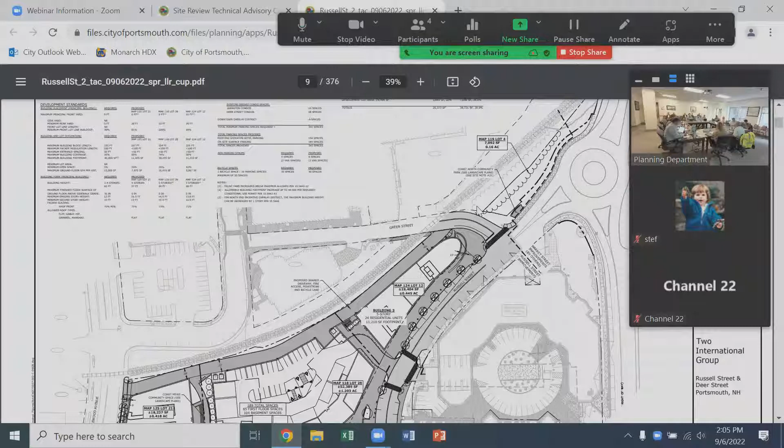Second, provide clear signage for parking garage parking and access. The rear drive aisle is signed as a private drive, and the garage access in the rear is going to be for residents only, so we don't really feel that additional signage is needed for that. I don't know if there's any further clarification of the intent of this comment or what is being sought, but we feel we've signed the site for the parking needs adequately.

Where will the visitor parking be? The visitor parking will be on the first level parking, and any residents will need to provide their guests access to get to those spaces. There's no public parking on site, so it'll all be controlled either by the valet of the hotel or by the residents in the building.

Third, add cobblestone channeling at the intersection of Green and Deer Street. I guess, is this intended to be within the center line of Green Street? Is that the thought here? I don't think we have an issue with it. The comment was add cobblestone channeling at intersection of Green and Deer Street. They don't meet.

I don't know if they meant Green and Russell, putting cobbles in the center line of the road. It must be that intersection, probably a Nick comment - he'll be here in a minute and we can clarify, but I'm sure that's what he meant. I can't remember what the cobbles were supposed to do though. We'll come back to that when he gets here.

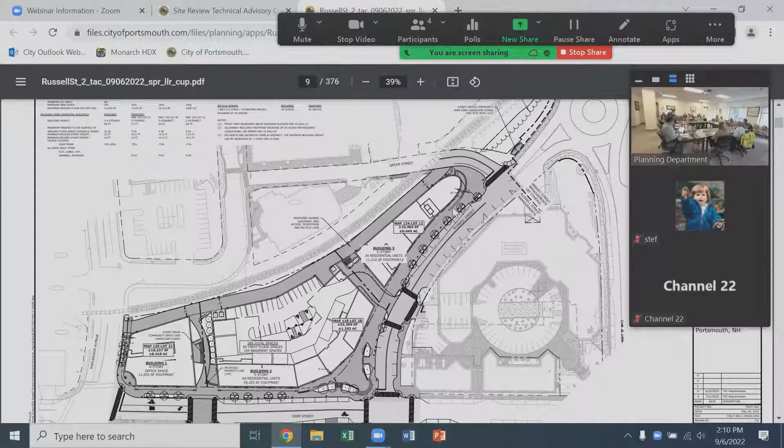Comment 7: please include a 5-foot mountable sidewalk to the building side of the shared path between the buildings and the railroad for designated bike and pedestrian area. Comment 47 actually contradicts this and asks for either striping or pavers to delineate that area, and our preference is to use flush pavers to delineate separate pedestrian bike access. The design intent was to have this be similar to Chestnut Street, where it's all flush pavers, all shared access, and when a car is accessing the garage, pedestrians and bikers move over to let the car pass. Having that mountable raised area kind of defeats the purpose of having that large shared access area.

On-site construction inspection required for everything in the right-of-way plus drainage - we acknowledge that. CMMP required - site note number 21 lists this requirement, so that's already noted on the plans.

Comment 10: confirm building footing is lower than city sewer line near Maplewood. I don't know about the depths of the footings at this time, and I don't even know if they've been designed yet. The sewer there is very deep - the invert into that structure is at 0.5, and the finished floor of Building 1 is at 17. So I'm assuming that's just something that will need to be taken into account when the building foundation is designed.

Construction, catch basin inlet protection on the opposite side of Maplewood is not required. That's fine, we can remove that.

Sidewalk crossings on train tracks need truncated domes, provide dome panels for both sides of the crossing, or replace the sidewalk up to the sidewalk on Vaughan Street. We can make that revision.

Both mid-block pedestrian crossings across Deer are shown with dual crosswalks. This reduces the amount of parking on Deer Street and will require parking and traffic safety approval. So we agree with the PTS approval. The plan does have a reduction in parking from what's out there today. I believe the current count is 7 reduced spaces. We do retain more of the on-street parking than the prior approval for this site, but we acknowledge that this will need to be reviewed by the committee as well.

Trying to get there, sorry. Drainage, one more sheet, Peter. Okay, thanks.

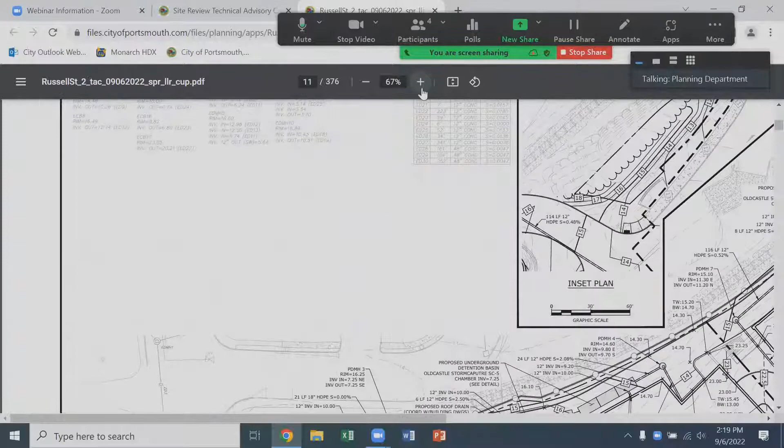Yeah, so on the left, catch basin, so we retain catch basin 3 as well, and then, okay. Yes, yep, sorry. Yeah, no, we... yep, can make that.

Move proposed catch basin 2 to the corner, eliminate drain manhole 14, and run new pipe to existing drain manhole 7. We can make that revision.

Eliminate proposed drain manhole 11 and run a new pipe from catch basin 5 to existing drain manhole 8. That's fine, we can make that.

Capture back driveway runoff as low as possible and direct it to proposed drain manhole 3. So the way this site is graded, the rear drive runoff sheets off the property as it does in the existing condition.

The drainage analysis has a detailed description of how we are meeting the city's treatment requirements for redevelopment sites. So we are treating and capturing the majority of the site's runoff, the majority of the impervious surface on the site, with really that rear access drive because of some of the grades. And I think it's noted in one of the next comments about how flat that drive is. Capturing a lot of that was difficult, but we were able to meet the treatment standards from the city's stormwater regulations for redevelopment.

While maintaining that existing flow pattern to the railroad. So that was 28 and 29.

Comment 30: the grease traps in the driveway to the garage are not located well. They need to be on the sides so that the driveway can still be used during cleaning.

So since we submitted these plans, we've been working with the project MEP and the architects to locate some of the mechanical spaces. And the water service lines for Building 2 are now going to be located up that driveway to access a mechanical room in the rear of Building 2. So along with the drainage, drain lines, electrical conduits, and then the 2 grease traps and sewer connections, that area is very tight.

So we will do what we can to try and keep those grease traps to either side as best we can. And as I had mentioned on a previous comment, that upper driveway is mostly going to be used for hotel valet across the street, so they will be able to manage that obstruction better than, say, if it was the main residential driveway, or if it was a public garage, which it's not.

So we'll try and accommodate it the best we can, but it's a tight space, so there's only so much room there. We're going to want to see where the mechanical rooms are on the next iteration for each building. I heard the building on the corner is not going to have a basement at all. So we're going to need to know where the mechanical room is planned so that we can see where the main's going to come out of the ground and all that sort of thing.

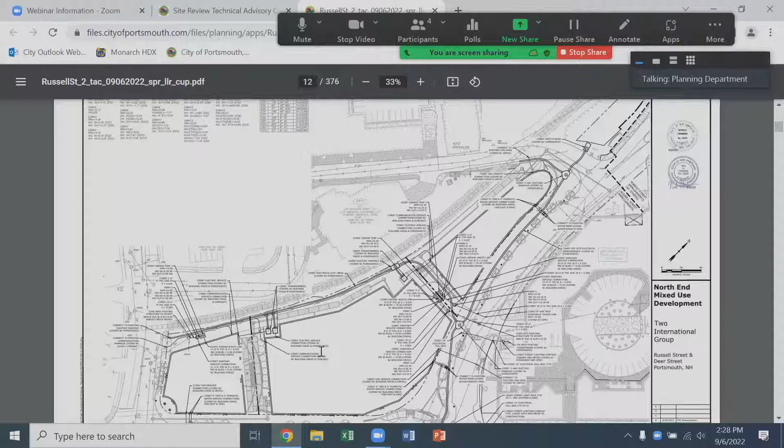Per traffic peer review, install a raised intersection on Deer Street at Portwalk Place, add drainage to accommodate. We acknowledge this is the city's street, so we'll do whatever the city desires. However, we don't agree that making this a raised intersection is the best option. We've basically designed this to mirror the opposite end of Portwalk, which has been operating without issues. Additionally, raising it will require added drainage structures, and there's a lot of existing utilities in that area that will likely conflict with any additional drainage structures needed. So if that's the wish of the city, we'll make that revision, but we don't necessarily agree with it.

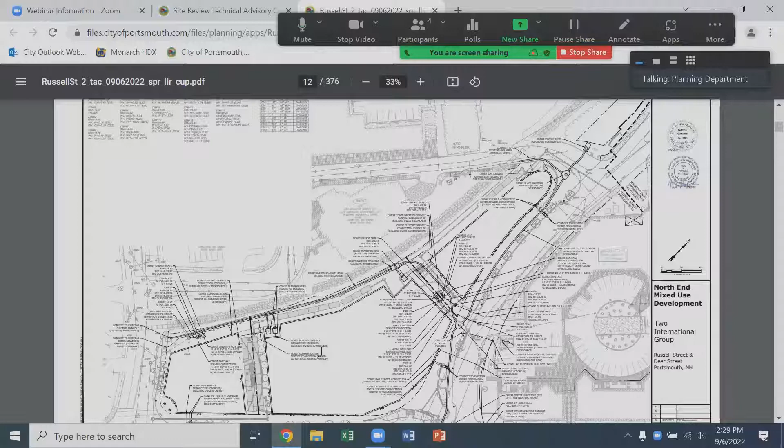Include comments and additions based on TEC's traffic memo, so that's fine. This prior comment was noted by TEC as well, with a list of other design items, so I'll run through those once we get through the city comments.

Parking, traffic, and safety review and approval, as well as city council approvals, are needed for on-street parking changes. We've discussed that one already.

Pre and post-blast survey and monitoring needed for the sewer line on Deer Street. That's fine.

All previous TAC comments must still be addressed. We have submitted responses to all of the comments previously received. So if there are any comments we've previously addressed that need further elaboration, please let us know and we'll do our best to address those, but we feel we've addressed all of the previous comments received.

Bump outs on the other side of Russell are proposed for the current bus stop location. Confirm with Coast that this will still work for them, or whether a new bus stop location is needed. In the existing condition, Coast has stops and signage on both sides of the road, but specifically on the Sheraton side there's no formal bus stop, pull-off, or shelter, so we're really just leaving that sign where it is. If the need for an additional or formal bus stop arises, that's going to eat into the on-street parking we have in that area, so that's the trade-off.

You all set? Yeah, I'm good for now.

I think one of the TAC comments was a possible gate on the driveway coming in from Russell, as a way to keep people, the public, or someone who's confused and thinks they can go in there, rather than once they drive in that driveway, there's no way out. They'd have to go in to turn around. Is that a consideration, to put a gate in, or something to keep?

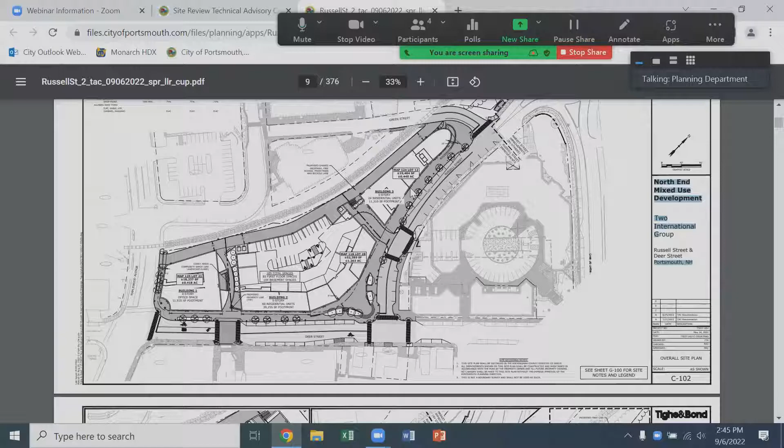Yeah, I don't know if a gate is considered. I think we've kind of talked about a couple different ways to handle that. I don't know if we have the answer yet. I think he's talking about this driveway, how to keep people out. This one? Yeah.

I think the only thing I worry about is, is it going to make pedestrians feel like they can't go through there and access the backside of the site, which was pretty intentional how we did that. I mean, we don't have an issue with it necessarily. I'd probably prefer to put signage up there instead of putting a gate in.

Why don't you put a gate in if you need it later? Couldn't they put a gate in later if it ends up being a problem? Probably have to run the conduit. You're gonna want one, I guess that's more important to say. I think if this becomes a problem for the tenant, they're gonna have an incentive to put a gate up rather than us have to tell them to put one in there, right?

Yeah, it's difficult to go in that building, turn around and come back out. So maybe a no public parking sign or something like that, and then maybe just leave some spare conduit there in case you ever need a gate in the future. We can talk about it.

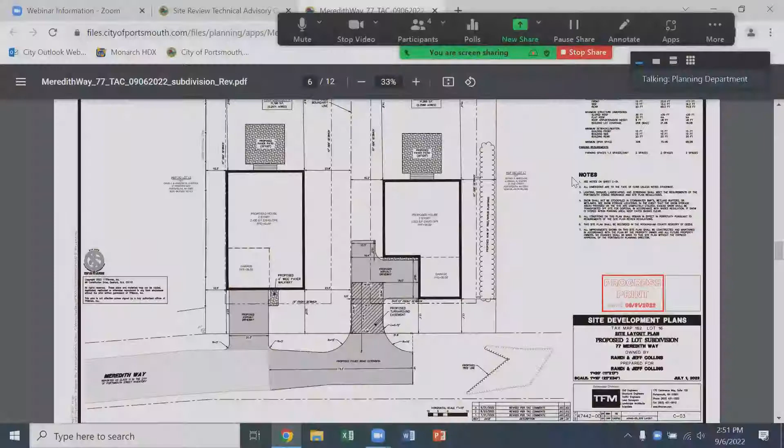The next one is one that I think we also need to discuss. This is a request that we extend the roadway to what would be about the middle of the proposed garage on the second lot. There's a couple of concerns we've had with this since the beginning. Number one is the sentiment within the neighborhood of adding additional pavement has been very negative, and we've been cognizant of that.

We'd also like to remind you that we proposed this plan at the behest of certain members of the staff. One of the understandings we had was that, while we understood we would have to go through full site review, the amount of work that we would have to do in the right-of-way would be somewhat minimal. So we'd like to see what we can do to get an agreement to limit the length of the roadway that you're expecting us to produce.

What we've proposed is an easement for a turnaround in the private driveway, which is not a problem, and we're agreeable to that. But the extension of the roadway, we're proposing to be, I believe, 73 feet, and we'd like to avoid having to extend it another 10 or 12 feet, which is what it looks like you're going to require us to do. So that's an issue that we'd like to discuss.

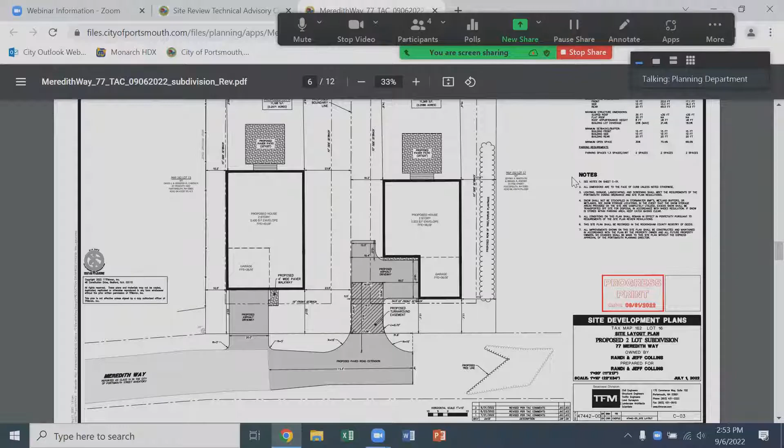So I'll just speak to that. The truck that plows this neighborhood is a Ford 5500 series truck. It is longer than the distance from the far radius to the shutoff, so literally the truck can't get into the turnaround that you're trying to provide. The back of the truck is already behind the driveway, so it can't back up into that space - there's not enough room. If we had a skid steer, we could do it, but...

Just out of curiosity - can I ask a question about that? What is the likelihood that the truck would just do reverse, forward, up and down the street? Because that's the existing situation. Right, and we're trying to get away from that - that's the purpose.

Because the way that Meredith is graded at the end where it meets Bartlett Street, there's a hill there. I don't know if you've ever plowed it in a blizzard like I have, but I have done it personally, and I can tell you there's zero sight distance when you back out into Bartlett Street. So we're trying to create a turnaround so that it's safe for our drivers, and so we can live with a road extension because it's safe. So the way you do it now is backing out? Yeah, we actually back out into Bartlett Street blind with the flashers going and hope for the best.

So you're going to turn around and plow the other direction? If you wanted to potentially provide an easement on Lot A instead of Lot B, that might be possible, as long as it had a good radius. Sorry, it doesn't work though. Doesn't work on that. There'll be cars in front of the garage, so that was the only other accommodation I could suggest. It's just literally not long enough. The truck is just too big to actually use that area. Okay, well, that's the answer that we got.

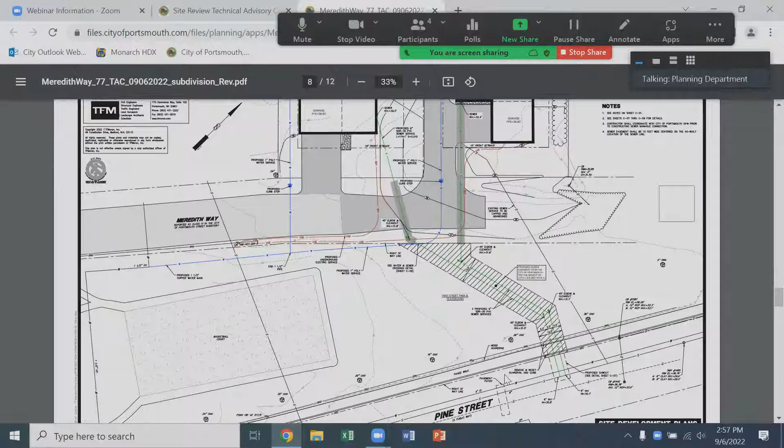Sewer cleanouts not allowed in the city park. That's another item I think we need to discuss. We can certainly remove the sewer cleanouts from the plan, but I guess it begs the question, if we do that, do we then propose sewer cleanouts in Pine Street and/or Meredith Way, or have no sewer cleanouts at all? It would be fine to put them in Meredith Way, just we don't want them in the park.

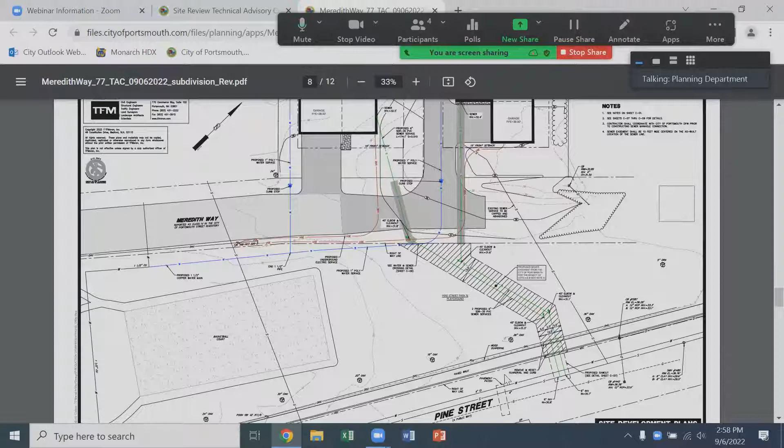A child could trip over it, land on it, et cetera, just inappropriate. Understood. So what we had done is the sewer cleanouts are at the elbows. If we put them in Meredith Way and Pine Street instead, they'll be away from those elbows. You don't need to have them in Pine Street, you should put them in Meredith Way. If you change the 45-degree bends to the 22s, you should have no issues. Okay, good, so we can accomplish that.

State standards for water service depth, that's fine. Warning tape, that's fine. Specify that the road gets heavy-duty pavement, again, that's agreeable.

As far as the riser in each rain garden, so water can get down through frozen media, I'm going to let Jack address that. We have the outlet structures in there with an orifice right at the ground level. We can just put a little chunk of under drain on there to make sure they drain into the rock. Would that be acceptable as opposed to risers? Yep. And the orifice should be just a little above the media, right? Yeah, yep.

Okay, then the next one, provide calcs. I think Jack has updated calcs. The sheet passed around has updated calcs on the sheet, but do you want an actual drainage summary? Yeah, just a quick summary. Executive summary would be fine, Jack. Okay.

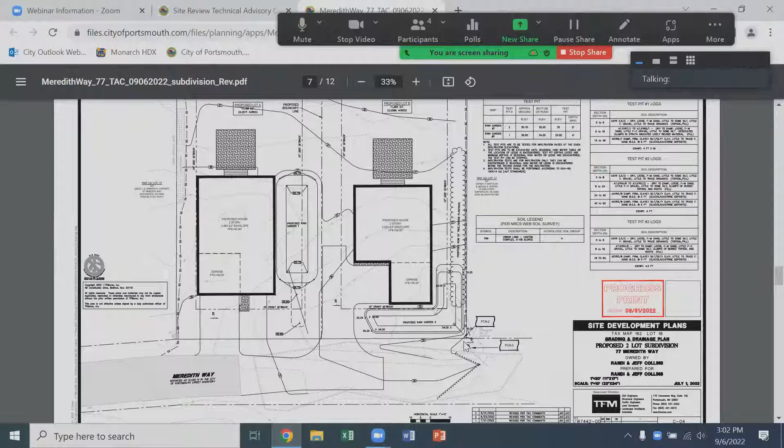Same thing going on in the other one, on Lot B, Lot A? Oh, the other one, you can see the front. I think what Lot A needs to be considered is a front porch with steps. Also has a front porch. Okay, so it has the same as Lot B? Yeah, I believe that's kind of what everybody has in the neighborhood. It's the front porch thing. I think it fits the character, and it diminishes these 2 cars that are gonna sit in front of the garage on Lot A and Lot B. You're gonna see cars, so that's good.

As much as it's a pain for you to extend that road, I get that, but I do think it's gonna make the turnaround better for your buyer. There's less likelihood that truck is gonna need to back up into a conflict zone behind the 2 parked cars. So I think that's an added benefit of extending the road 10 or 12 feet or whatever the number is. I don't think it's a good design to have the easement area behind the parked car, which would maybe stay there but not likely ever get used, because the truck would be able to go further down Meredith Way and just back into that lot.

Anyway, just an observation. What about the dormers? Nothing. Being a wise guy. I'm just being me. I'm sorry. It's refreshing for him to be funny, though, right?

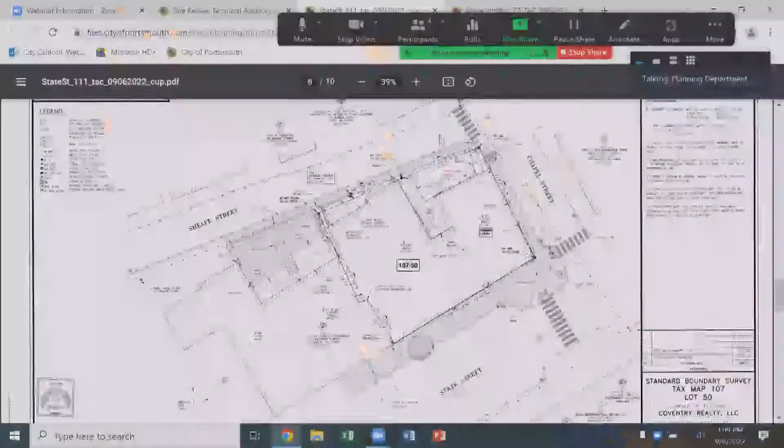And we've redone the parking calculations for that, which added another — Tracy, what did it add, one more space? Another space, because a bunch of them are micro apartments in the 2 we've made — smaller than 500 square feet. So we have that plan of the second and third floor. On your plan you'll just see the second floor as 1 unit, third floor as 1 unit. The third floor always was 1 unit.

So we don't think it would operate well with a 2,000 square foot unit — it looks too much like a boarding house to me, with a lot of bedrooms. That's why we felt the smaller units were more realistic, because they want to be apartments, not 3, 4, 5 bedroom units. That's what drove us to make them separate units.

I believe it went to the paper today, and I believe the abutter notices went out last — it's such a tight turnaround, John. And this month in particular, because the submission date was so close to the meeting, the abutter notices have gone out — it's an early Thursday — and so we would probably need to renotice.

Renotice, yeah, we just have to. So we would have to request postponement and then place it on — actually, withdrawal, I have to check, but I would think it couldn't go in September because it went to the paper, I believe, actually I think it went to the paper last week.

Mark, would you consider giving the city a small triangle-shaped easement for where the sidewalk goes over the property? The existing sidewalk, just to memorialize that, over this corner here? Yeah, just an easement for the sidewalk, just as it sits. Oh, sure, yeah, happy to. Thank you.

That absolutely makes sense. Appreciate that. Yeah, thank you. No, it makes sense. Is that at the northerly corner? Right here, Chief? Mhm, yeah, yep, gotcha, yep. Yeah, I hadn't noticed that. Good catch.

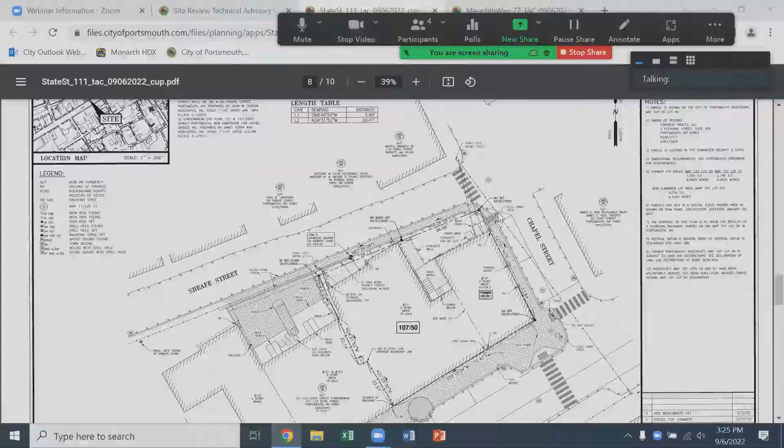Dave, if you wondered, the dormers are great. Oh, I saw the dormers. They're on here, they are great. They were so good that you didn't have to comment on them, which is nice.

So did you decide if you're going forward, or is it going to be delayed a month? Planning board can't, it has to be delayed till October because we have to re-advertise, but we will let this count as the TAC meeting, and then we can say that you've brought it to TAC, unless there's additional comments from the TAC that I'm not aware of, and presuming they're ready to move it forward.

Motion to move it forward. Second. All right, all in favor? Aye. All right, motion carries. Thank you, everyone, appreciate it.

We'll get that submitted before the end of the month for the next planning board deadline, is it? I think it was the 23rd of September. Did a good job on your end. Thank you.

I did upload the plans to the web, but the first comment was that a stronger design is needed for the pocket park. I don't know if that comment came from anyone in particular, but we will definitely be agreeable to updating that design. Are there any particular suggestions you'd want us to pay attention to through the course of the meeting? You can let us know.

As far as the pocket park calculation of square footage, the comment was to not include the transformers, fencing, retaining walls, drainage infrastructure, etc. So if you look at sheet C3, the plans have been revised to eliminate those components from the community space, with the exception of the underground drainage component, which is under the usable space. We feel that has been allowed in other situations and should be allowed here.

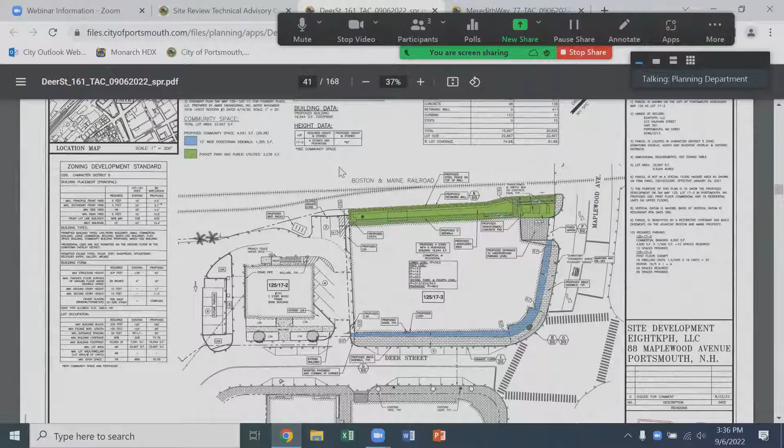So the revised site plan C3 has taken back that community space area to not include the transformers or the retaining wall, and the community space calculation in the upper left now has the total lot area of 22,667, with a proposed community space requirement of 20%, being 4,534.

The next comment was to provide ADA accessible access to the pocket park from the western corner of the proposed structure. We have ADA access from the Maplewood Avenue side. We believe that's sufficient. We can provide some signage to say there's no other access for ADA at that end.

I think if you provide access in one form, you have to provide ADA access as well. I'm not sure of that, but I believe that's the requirement. So the west end you're talking about, it doesn't connect to other community space, so...

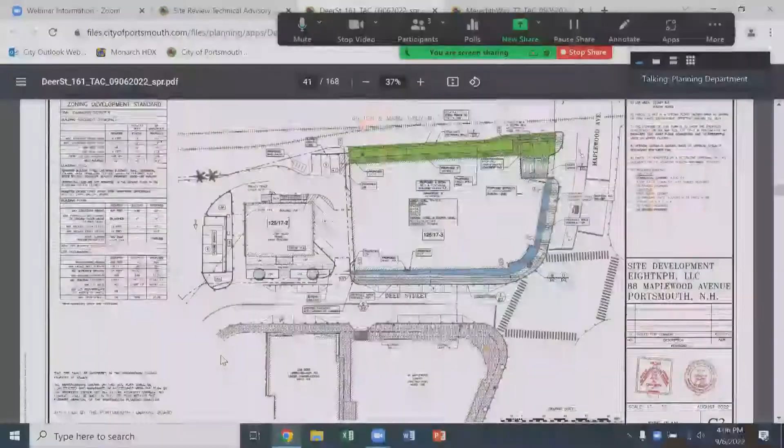Yep, we're going to look at that. Are those transformers staying the way they are, or are you going to have to upgrade them? And maybe an opportunity to rearrange them? Off the top, the little one at the corner is actually short - it's only about 3 feet high, and it's 13 feet from the curb, so you still have a 200-foot sight line in both directions, even from the lot line, never mind the end of the driveway.

What we don't know from Eversource, because I forgot to ask Nick, is what voltage that transformer is. If it's the same voltage as our building, we'll just tie them into the new transformer and eliminate the little one. But if it's 277 or something, it's going to be weird - a household 120, 240, that's what the little ones are.

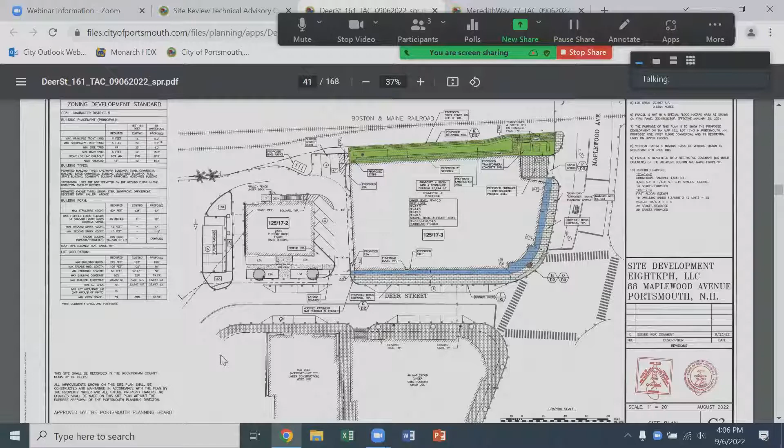Is it needed, do you reckon? Probably not, be great to get rid of it. I have no idea what it's for. I think it's just powering the signals for the railroad - the blinking lights and the crossing arms.

So they may be able to run on 120, 208. We have the work order request in, and hope to meet Eversource soon. As I'm sure you know, they're quite busy.

I don't think those signals actually run on 240 volts - they probably run on the 120 side, so they wouldn't even see a change, and you can get rid of a transformer. Yep, that'd be great.

I didn't have a problem with the driveway when it was just an access for the transformers, but accessing the whole lot in and out, that's a big concern. You're so close to the signal and so close to the railroad tracks - if someone does allow you to come out of the driveway, you still have the through lane, then the left lane moving on a green signal first. It's not a good situation to be coming out into traffic at that spot.

Coming out on Deer Street is a much better option as far as traffic safety is concerned.

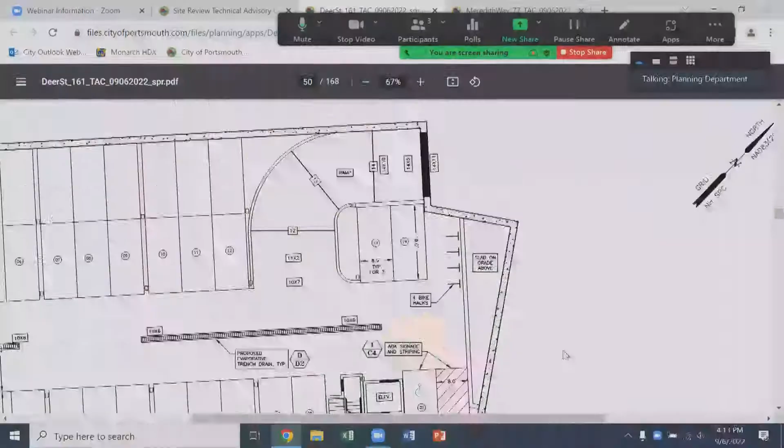So if you look at the parking plan, C4, in the original set, you see the racks are way on the right side, and the distance from the edge of that space to the wall is 9 feet.

I saw one plan that had a note right on the heads of all the parking spaces. I think the architectural plans are contemplating some bike racks at the end of the parking spaces - sheet A2. Since they're tandem spaces, it seems like a good location, especially across the back.

Actually, those aren't spaces - there they are, located at the termination of the space. These racks are collapsible so they can be flush mounted to the wall if an owner doesn't have a bicycle, but it provides additional space for bikes at the head of the space.

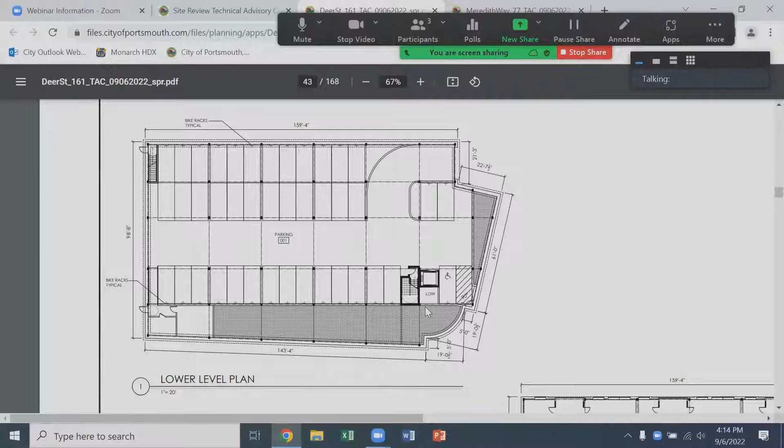We have that at Vaughan Street where my office is, and Tom and his wife live upstairs, so we're used to those.

So would they have to move their car to get the bike down? No, you can pull it off and take it out - it's off to the side a little so you can actually reach it. It's horizontal, the bike's flat to the wall, up above the hood essentially.

You have to lift it over the hood. Are the spaces assigned? Yeah, they're deeded, so it'd be the same person's bike as vehicle. And actually, it's not in the notes, but we anticipate pre-wiring the garage for EV chargers as well.

So those would be a factor - some big ones. It's not as bad as you might think. I'll show you my electric bill, it's not terrible.

So I've got a question - is there a reason you guys are having two sewer services come out to Maplewood? Would it make more sense to have one service come out, or one connection at least? Based on past practice, you want the residential units to have a sewer service and the commercial units to have a sewer service, so that's why we're showing it that way.

Hopefully one of them can be reused from the existing building. And then it looks like the steps coming off onto Lot 4 at the back of the building are being built directly over the gas service for the building on Lot 4.